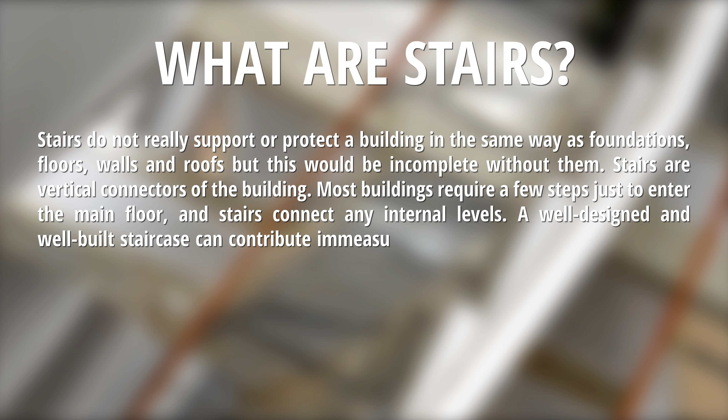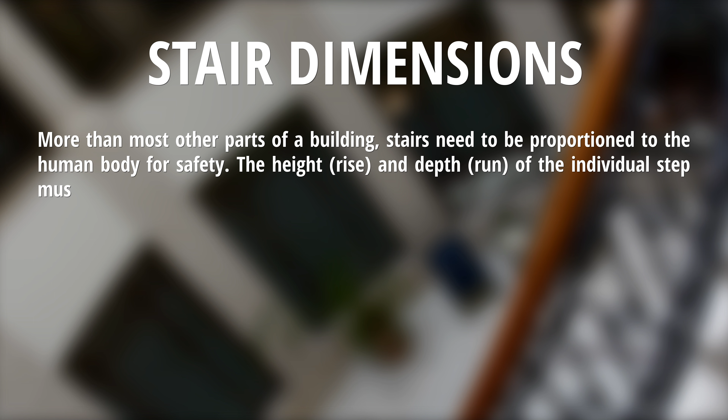Stair dimensions. More than most other parts of a building, stairs need to be proportioned to the human body for safety. The height, rise, and depth run of the individual step must be in a comfortable relationship for the average person and must be manageable for people who are infirm or disabled. Building codes prescribe a range of dimensions for rise and run, a minimum width for stairways, the location of handrails, and a minimum head clearance over stairs. The numbers vary depending on the location of the stairs, the building type, and the specific code. The typical requirements are outlined as follows.

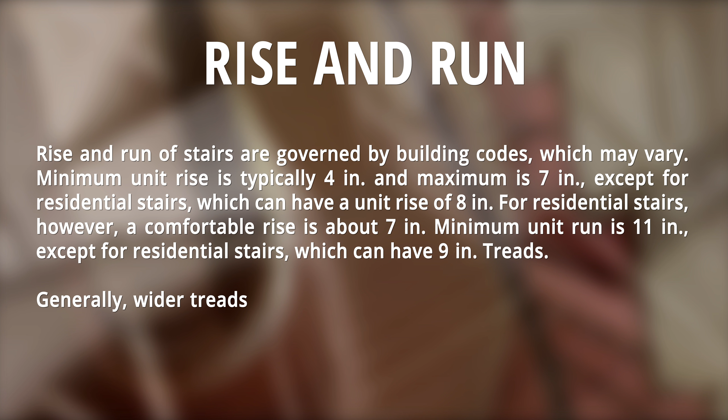Rise and run of stairs are governed by building codes, which may vary. Minimum unit rise is typically 4 inches and maximum is 7 inches, except for residential stairs, which can have a unit rise of 8 inches. For residential stairs, however, a comfortable rise is about 7 inches. Minimum unit run is 11 inches, except for residential stairs, which can have 9-inch treads. Generally, wider treads have shallower risers. Here are two useful rules of thumb for this rise-run relationship: rise plus run equals 17 to 18 inches, and run plus twice the rise equals 24 to 26 inches.

Rise and run. Both for safety and for code compliance, it is important to make each riser of a stair the same height. Most codes allow only 3/8-inch variance between the tallest and shortest riser in a flight of stairs. The maximum total rise between floors or landings is typically 12 feet. Landings must be as deep as the width of the stairway, but need not exceed 44 inches if the stair has a straight run.

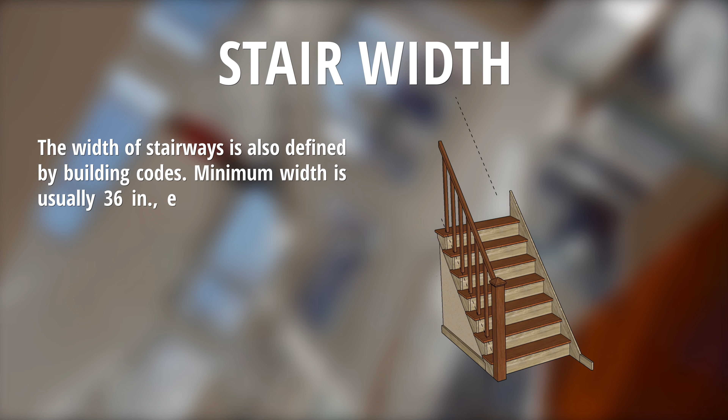Stair width. The width of stairways is also defined by building codes. Minimum width is usually 36 inches, except for residential stairs, which may sometimes be as narrow as 30 inches. Minimum widths are measured inside finished stairwells, so rough openings must allow for finished wall surfaces.

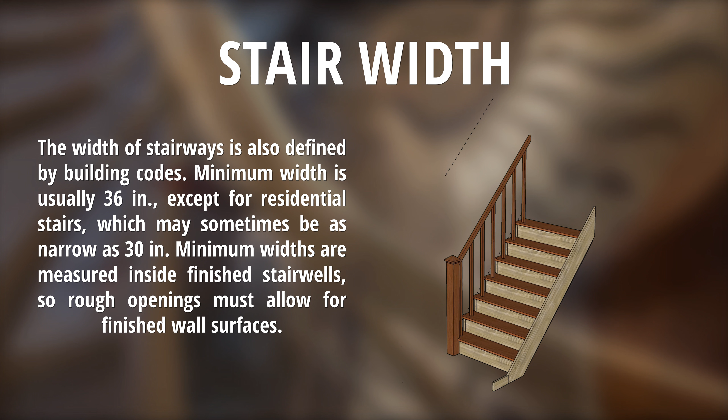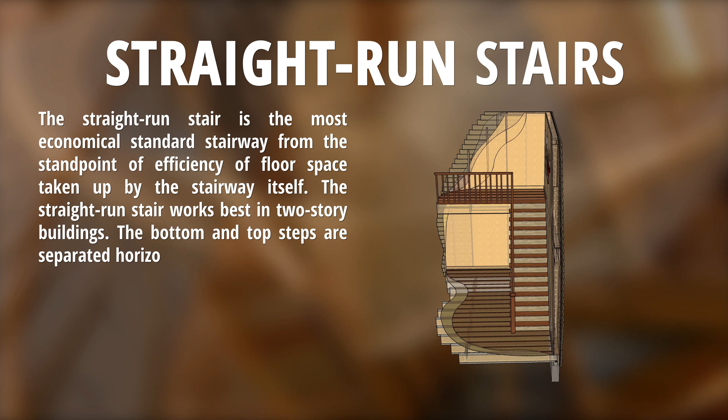Straight run stairs. The straight run stair is the most economical standard stairway from the standpoint of efficiency of floor space taken up by the stairway itself. The straight run stair works best in 2-story buildings. The bottom and top steps are separated horizontally from each other by the entire length of the stairway, so multi-story buildings with stacked stairways require circulation space on each floor to get from the top step of one flight to the bottom step of the next.

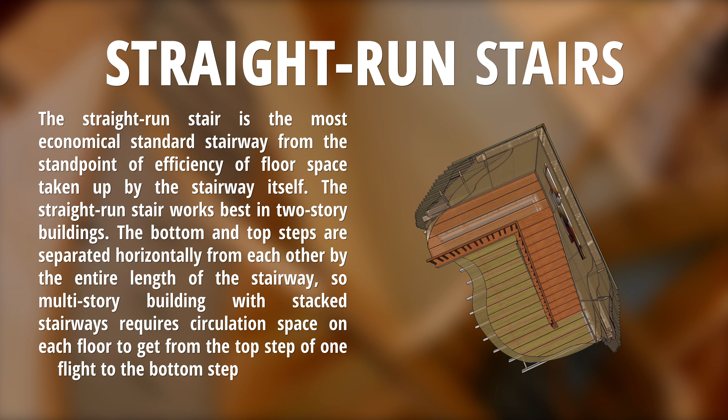U-shaped stairs. The U-shaped stair, also called the switchback stair, has a landing about half a flight up, and the flights run opposite directions. The area of the stairway is increased over a straight run stair by the area of the landing, less one step, but the top step of one flight is adjacent to the bottom step of the next.

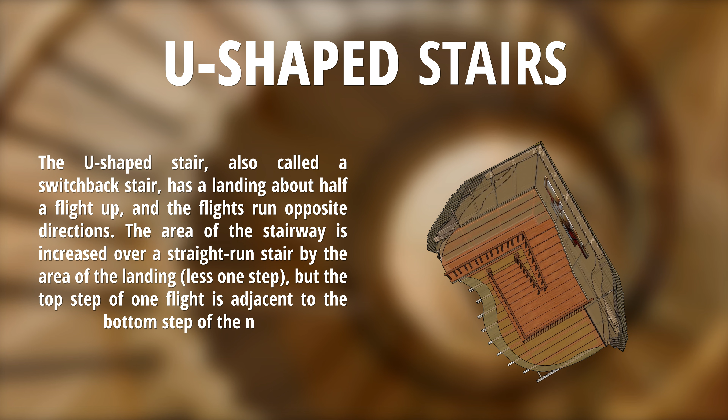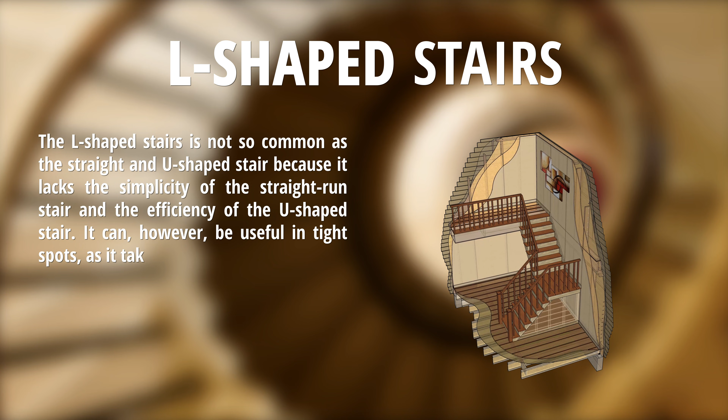L-shaped stairs. The L-shaped stair is not so common as the straight and U-shaped stair because it lacks the simplicity of the straight run stair and the efficiency of the U-shaped stair. It can, however, be useful in tight spots as it takes up less floor space than a U-shaped stair and requires less length than a straight run stair. The framing of the opening in the floor for this stairway can be atypical because of its L shape.

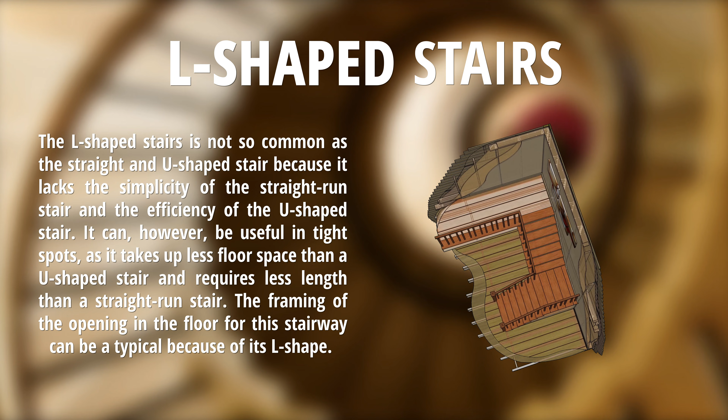L-shaped stairs. Winder stairs at the bend in the L or at the bend in the U-shaped stair are common, but for reasons of safety should not be allowed to be less than 6 inches deep at the narrow end. Verify with local codes.

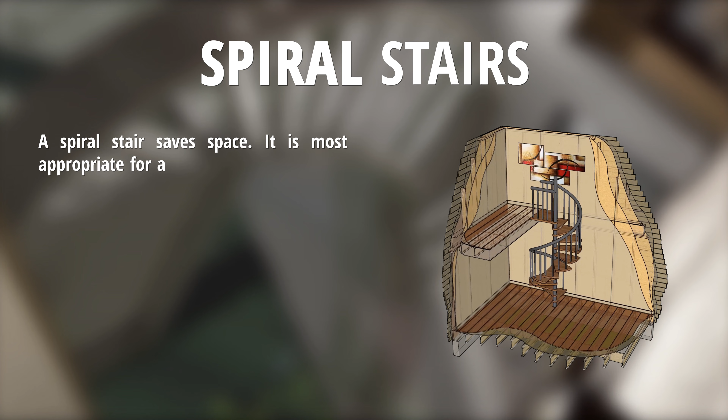Spiral stairs. A spiral stair saves space. It is most appropriate for accessing mezzanines and lofts where furniture and other large items may be hoisted from floor to floor by means other than the stairway. Spiral stairs usually have special code requirements that are somewhat less restrictive, often available as metal or wood kits.

Structural types of stairs: continuously supported stairs, free-spanning stairs.

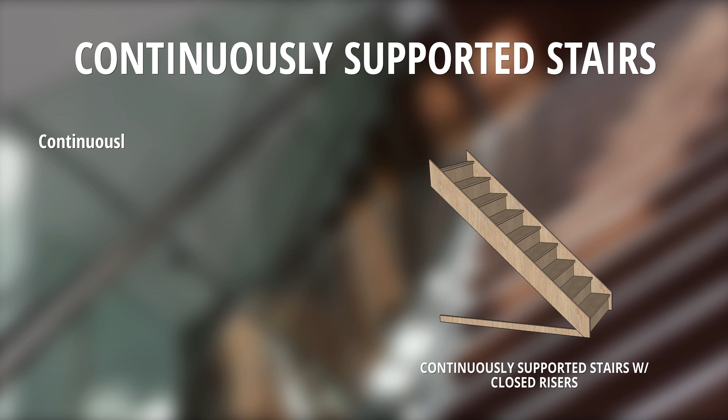Continuously supported stairs are commonly used as interior stairs. Both sides of the stairway are supported by wall framing, so calculations of spanning capacities are not necessary. These stairs are site-built in some regions, but are predominantly prefabricated in others.

Free-spanning stairs have the structural capacity to span from the bottom stair to the top stair without intermediate support. The free-spanning stair is commonly used as an exterior stair between floors or landing levels, or in conjunction with porches

and decks. It is often also seen as an access stair to basements and attics. The strength of the free-spanning stair is usually in the carriages, or stringers, that support the treads, although the handrail may also contribute to the strength of the stairway.

Free-spanning stairs, like continuously supported stairs, may be site-built or prefabricated. Some free-spanning stairs have only a single central support.

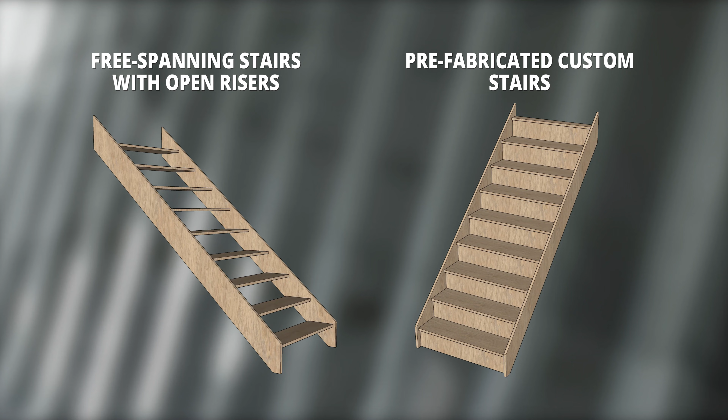Let's take a look at these two detailed illustrations. On the left, free-spanning stair with open risers. On the right, prefabricated custom stairs.

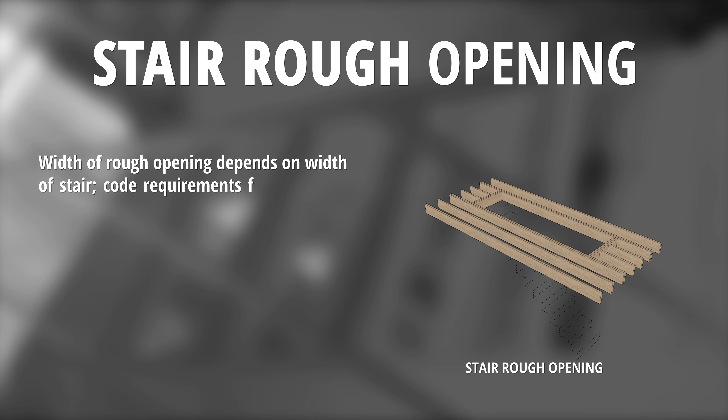Stair framing: stair rough opening and carriage framing. The width of the rough opening depends on the width of the stair. Code requirements for width are for clear openings, so allow for the thickness of wall finish when dimensioning a rough opening. Take a look at this detailed illustration.

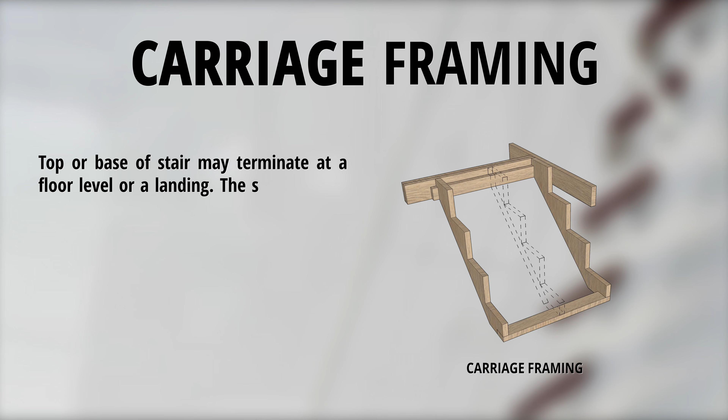Carriage framing. The top or base of a stair may terminate at a floor level or a landing. The stair framing can be the same in either case. The term carriage is interchangeable with stringer in some regions. Take a look at this detailed illustration.

Stair landing framing. The finished landing must be at least as deep as the stairway is wide, automatic in the case of an L-shaped stairway. Set the landing height so that the finished floor level corresponds to the rise of the stair. Take a look at this detailed illustration here on the right.

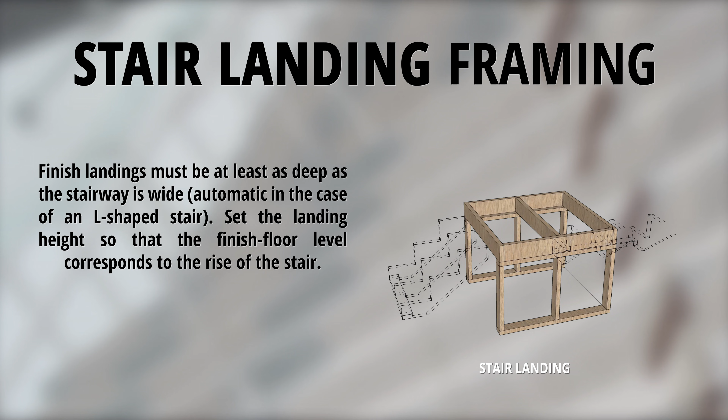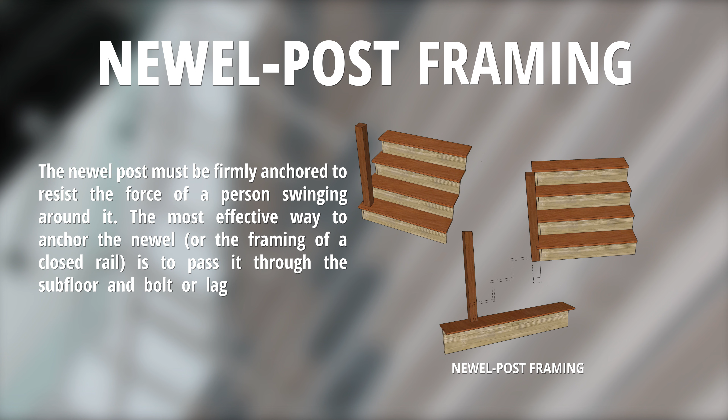Newel post framing. The newel post must be firmly anchored to resist the force of a person swinging around it. The most effective way to anchor the newel, or the framing of a closed rail, is to pass it through the subfloor and bolt or lag it to the floor framing. Take a look at this detailed illustration.

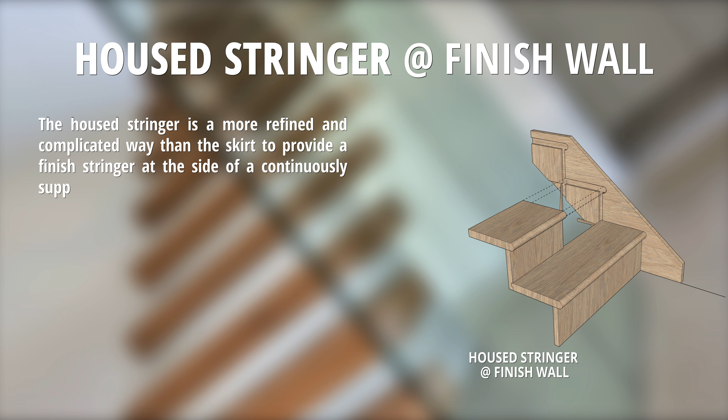Housed stringer at finish wall. The housed stringer is a more refined and complicated way than the skirt to provide a finished stringer at the side of the continuously supported stairway. The advantage of the housed stringer is that joints between treads, risers, and finished stringer will not open up with

shrinkage or other minor movement of the structure. Disadvantages include the extra labor to build the housed stringer and the fact that it does not provide framing for a temporary construction stair. Good quality prefabricated stairs are also made with housed stringers. Take a look at this detailed illustration.

Open balustrade with curb. In an open balustrade with a curb, the treads and risers are constructed on carriages and finished on both sides with a skirt, just as if the stairway were constructed between two walls. The skirt on the open side of the stairway forms one side of the curb.

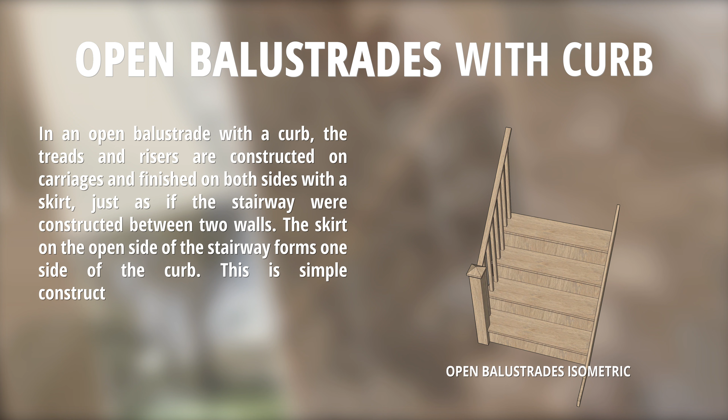This simple construction has a similar aesthetic effect as the more technically difficult open balustrade without a curb. Let's reference this detailed illustration.

Open balustrade without curb. In this traditional treatment of the open balustrades, the balusters rest on the treads and the ends of the treads are exposed and finished. The balusters may be attached to the treads in four ways: toe-nailing, dowelling, mortising, or sliding dovetailing.

The exposed ends of the treads may be finished in one of the following ways. The treads may be cantilevered and rounded or chamfered like the nose of the tread. Take a look at this detailed illustration.

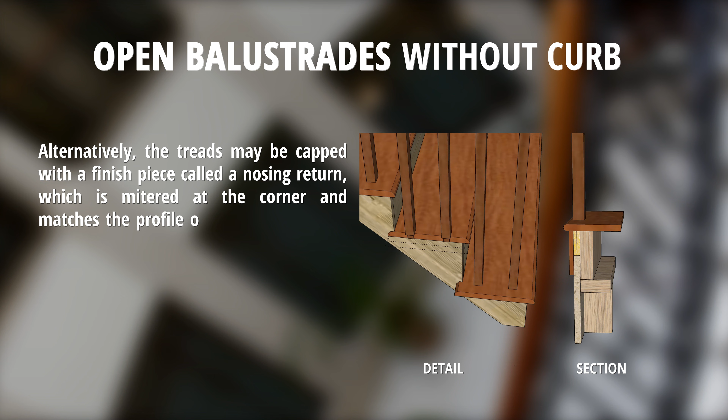Open balustrade without curbing. Alternatively, the treads may be capped with a finished piece called a nosing return, which is mitered at the corner and matches the profile of the nosing. This is the most refined finished treatment and is usually used in conjunction with mortised or sliding dovetail balusters. Let's reference this detailed illustration.

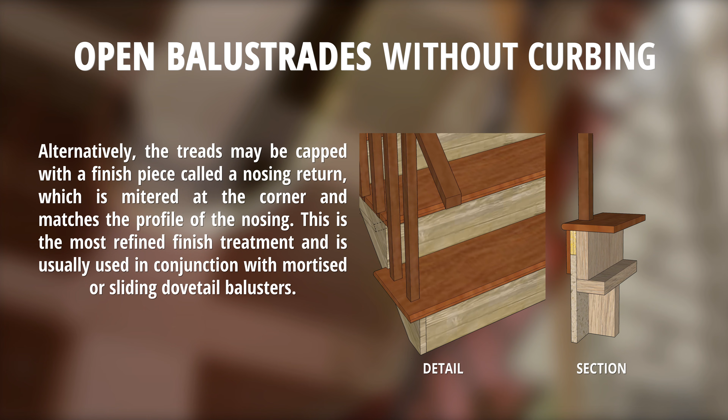Closed balustrade. The closed balustrade is very economical to build because it involves the least finished work of any balustrade system. The balustrade is framed like a standard wall, except that the base must be anchored like a newel post

Handrails provide stability and security for the young, the old, the blind, and the infirm. In addition, handrails are a safety feature for anyone who uses a stairway, one of the most likely and dangerous places for people to trip and fall. In terms of safety, the most important design feature of a handrail is its ability to be grasped, especially in an emergency. The 1.5-inch to 2-inch round rail is the most effective in this regard, as it allows the thumb and fingers to curl around and under the rail. Other shapes are allowable by code, but are less graspable.

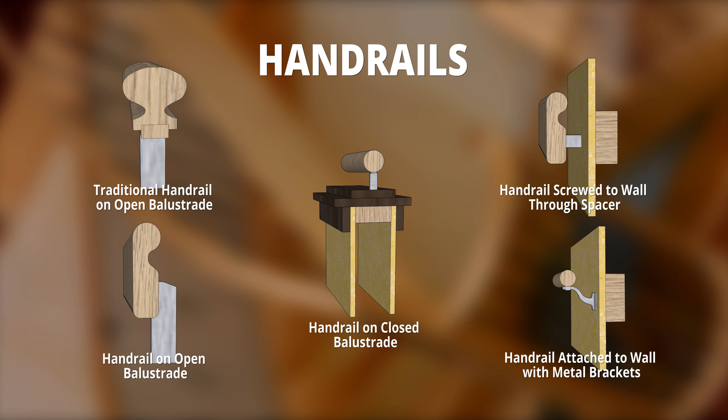Exterior wood stairs should be built of weather-resistant species such as cedar or redwood, or of pressure-treated lumber. Simple connections that minimize joints between boards are less likely to retain moisture. Where joints must occur, it is best to minimize the area of contact between pieces so that the moisture will drain and the lumber can breathe.

Most exterior wood stairs are free-spanning. For long runs of stairs, the continuous unnotched carriage is usually required for strength. Short runs of stairs may be strong enough with a notched carriage, as of course are wooden stairs built between two parallel concrete or masonry walls.

Dry-set brick steps are supported on a bed of compacted gravel on the ground and are laid dry without concrete or mortar. The bricks must be contained at the edges or they will separate. A 2x decay-resistant header used as a riser will contain the bricks at each step. Let's reference this detailed illustration.

The sides of the steps may be contained with 2x headers the same height as the riser. These side headers may be staked to the ground so that they contain the step at the sides on their own. Let's reference this detailed illustration.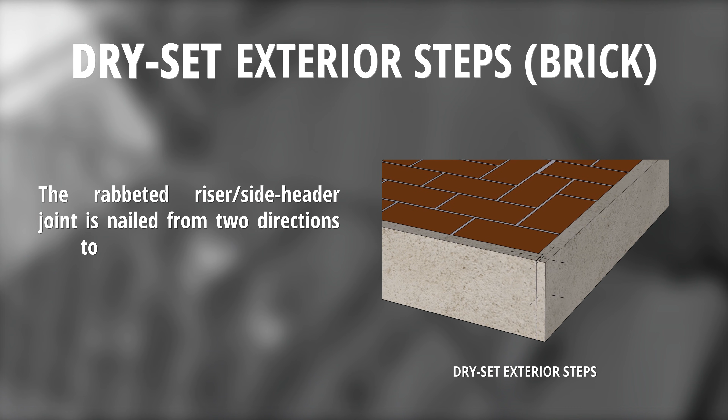The rabbeted riser side header joint is nailed from two directions to lock the joint together. Take a look at this illustration.

The sides of the brick steps may also be contained between two masonry or concrete walls. Let's reference this illustration.

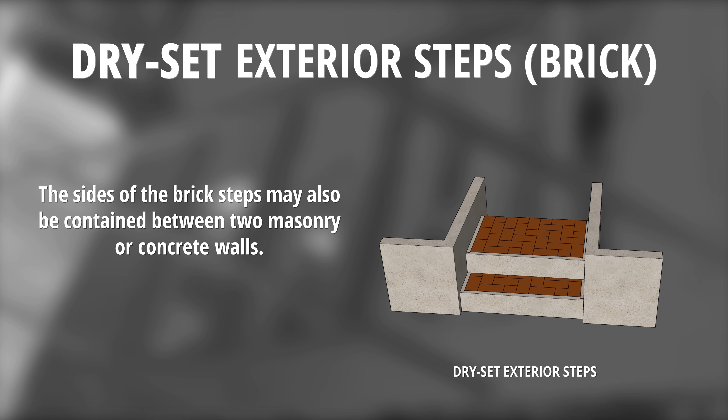A third alternative is to contain the sides of the steps with decay-resistant stringers at the slope of the steps. The risers may be attached directly to the stringers. Let's look at this detailed illustration.

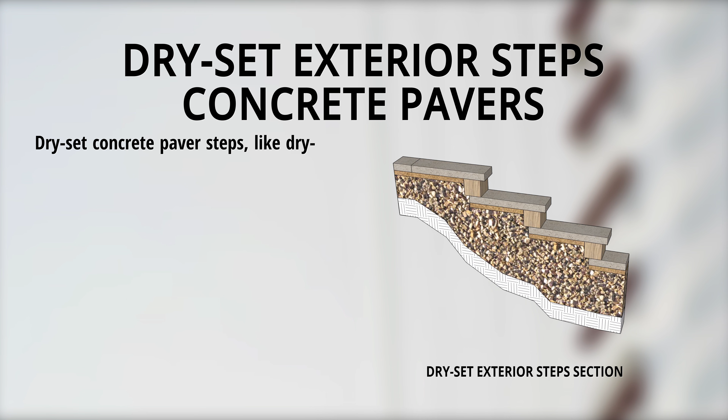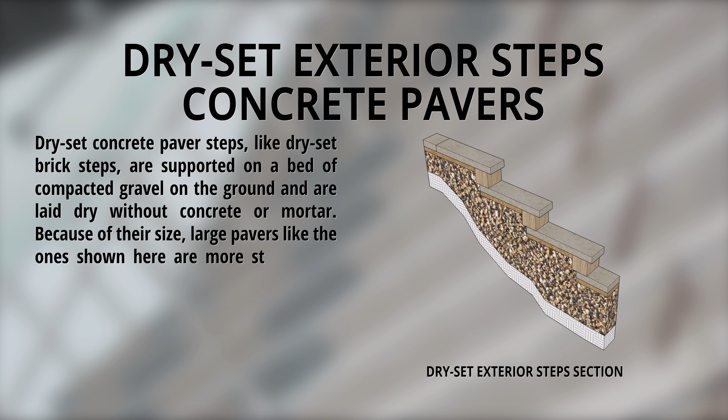Dry-set concrete paver steps, like dry-set brick steps, are supported on a bed of compacted gravel on the ground and are laid dry without concrete or mortar. Because of their size, large pavers like the ones shown here are more stable than bricks. For this reason, paver stairs may be constructed without containment at the riser. Some paver stairs are even constructed without containment at the sides. Take a look at this detailed illustration.

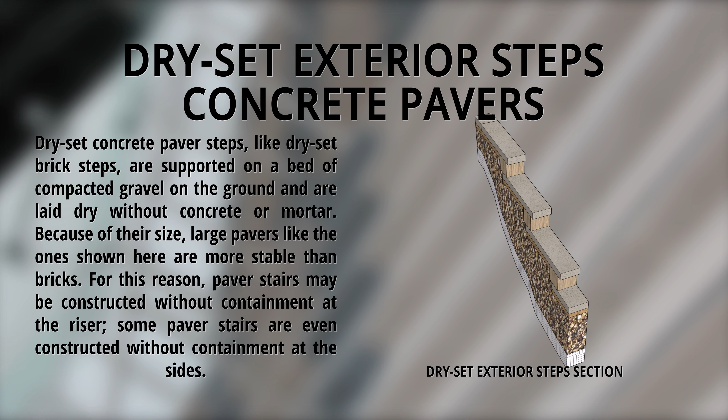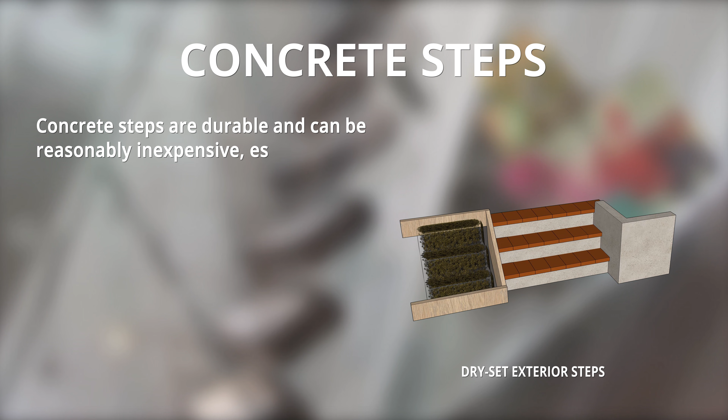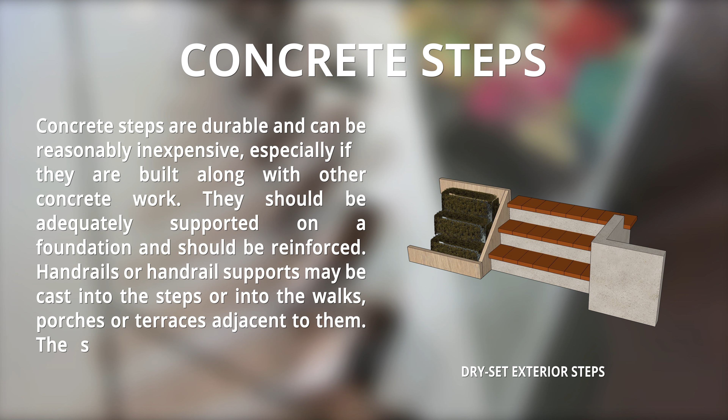Concrete steps are durable and can be reasonably inexpensive, especially if they are built along with other concrete work. They should be adequately supported on the foundation and should be reinforced. Handrails or handrail supports may be cast into the steps or into the walks, porches, or terraces adjacent to them. The steps may be covered with a masonry or other veneer. Let's look at this detailed illustration on the right.

The main problem with concrete steps is that they are difficult to repair if anything should go wrong with them. The usual problem is settling due to the extreme weight of the steps themselves and to the fact that they are often constructed on fill. Take a look at this detailed illustration here.

Stairs summarizing: framing, treads and risers, balustrades, handrails, exterior stairs, exterior steps.